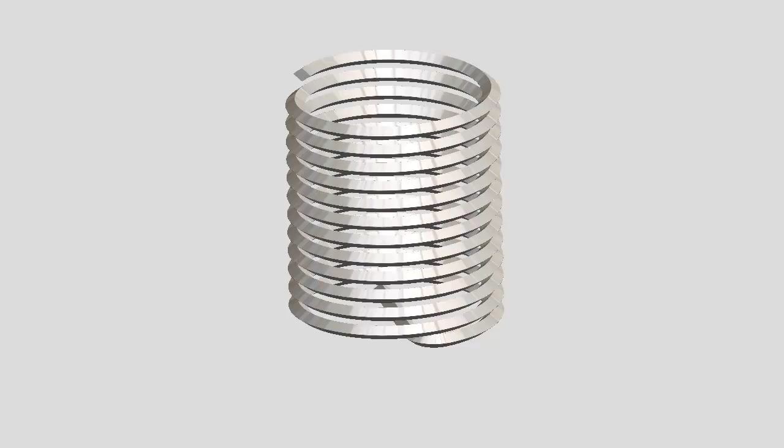In this video, I will demonstrate the use of a helicoil thread repair insert. A helicoil is essentially a spring made of formed stainless steel coil wire. The wire has a diamond-shaped cross-section that becomes the new threads once the insert is installed in a housing.

The insert is provided with a tang that is used to install the insert, as I will demonstrate later. There is a slight notch that is provided to help break off the tang after the insert is installed.

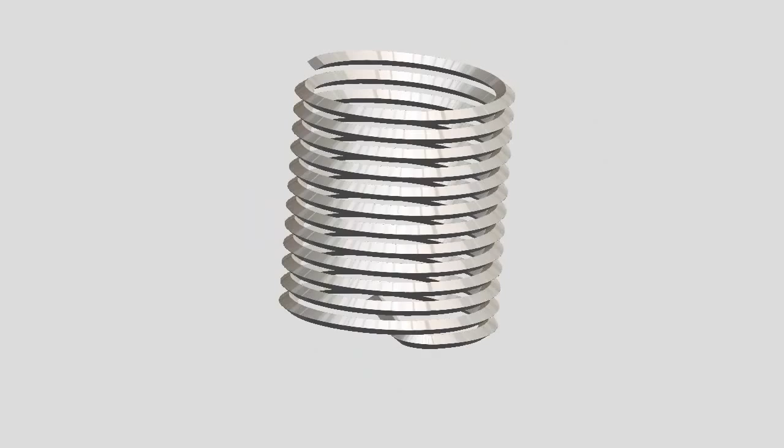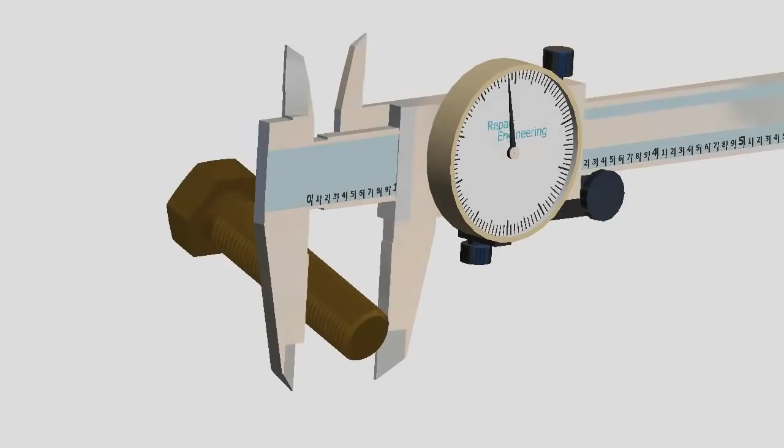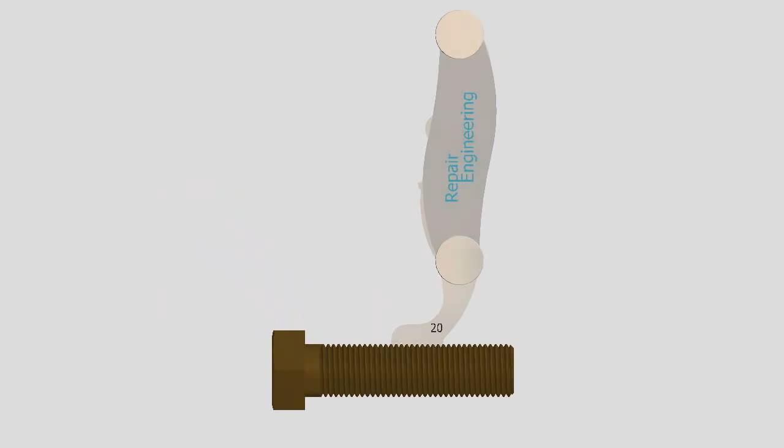Start by determining the size and pitch of the thread being repaired. One way to do that is to measure the thread major diameter of the mating bolt. Then, measure the thread spacing, or pitch, using a thread pitch gauge. You want to look for a good fit between the gauge and the threads of the bolt.

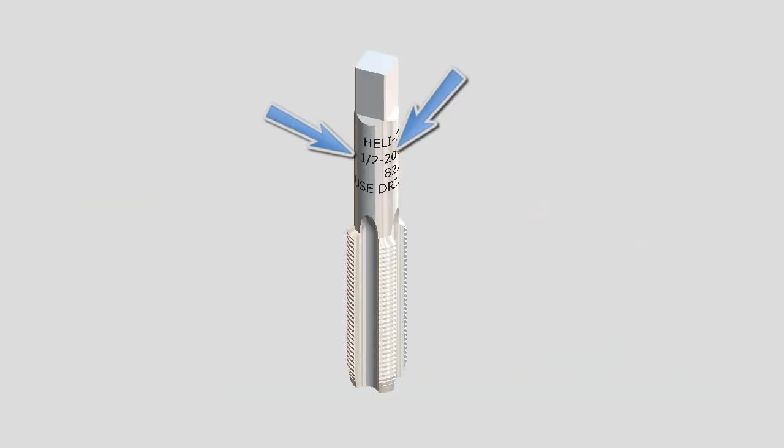Knowing the bolt size and thread pitch, select a repair kit that is appropriate. The thread size and pitch are marked on the body of the tap. This marking of STI indicates screw thread insert. It is not a standard tap size. Notice that the recommended drill size is also marked on the tap.

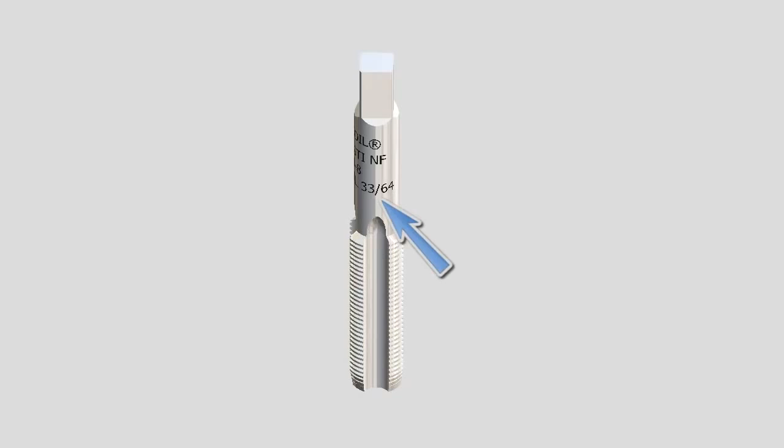To prepare the housing for installation of the helicoil insert, drill out the old threads in the hole to be repaired using the recommended drill, and cut new threads using the helicoil STI screw thread insert tap.

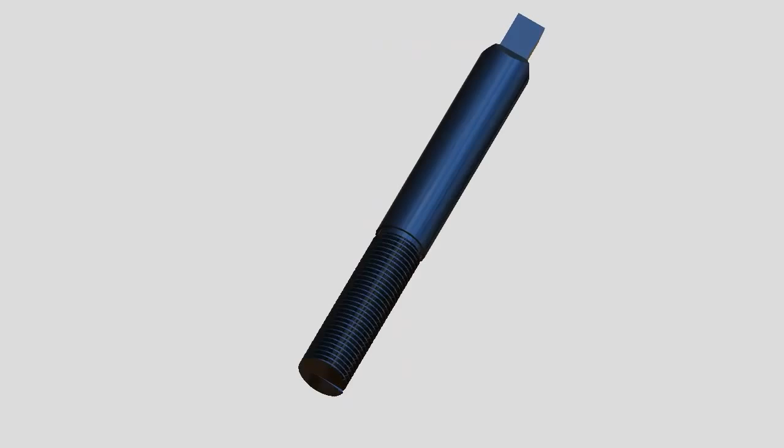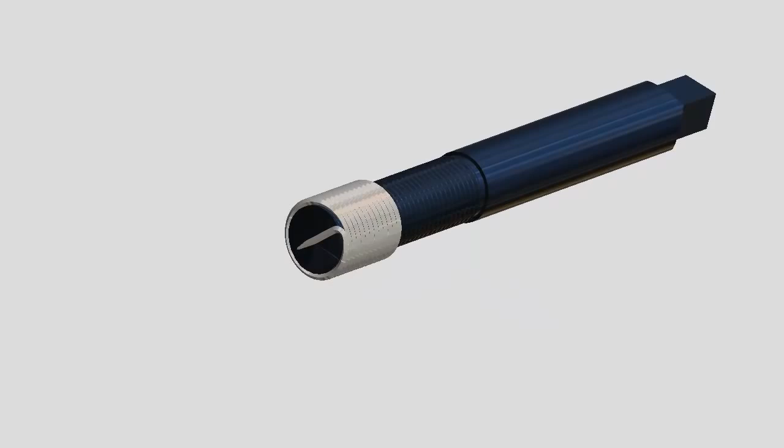A helicoil is installed using an installation tool or driver. The installation tool has a notch that engages the tang of the helicoil to help thread it into the housing. When repairing coarse pitch threads, simply slide the helicoil onto the driver and rotate the insert so that it contacts the notch.

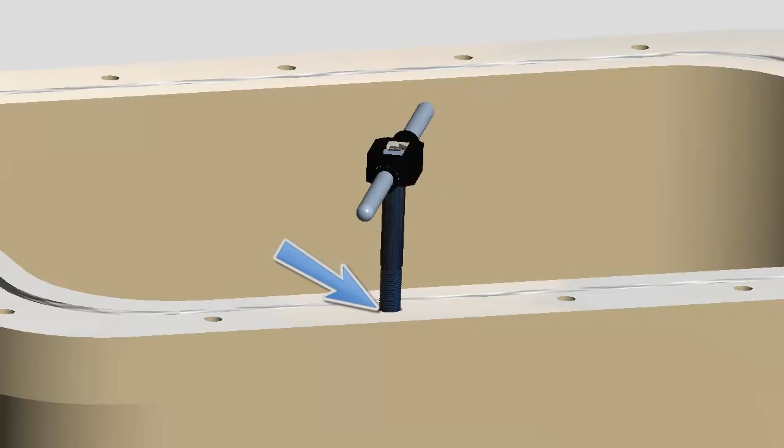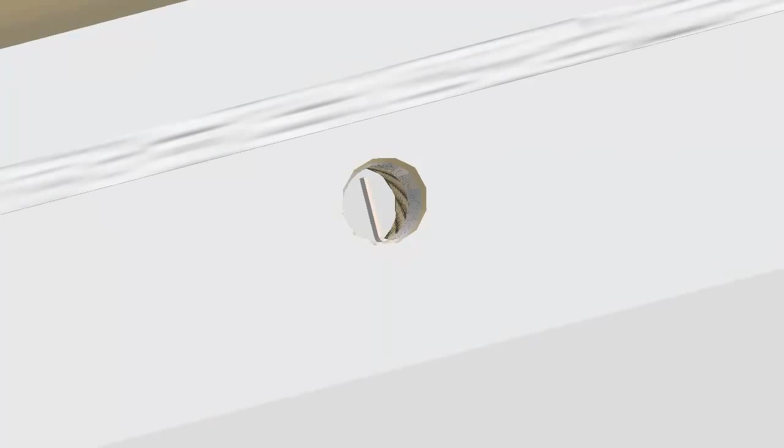Install the helicoil into the housing by threading the insert into the newly cut threads. Be sure that the end of the installed helicoil is recessed below the flange surface. Once seated to the proper depth, unthread the driver from the insert. At this point, the tang of the insert is still attached. I will demonstrate how that is removed in a moment.

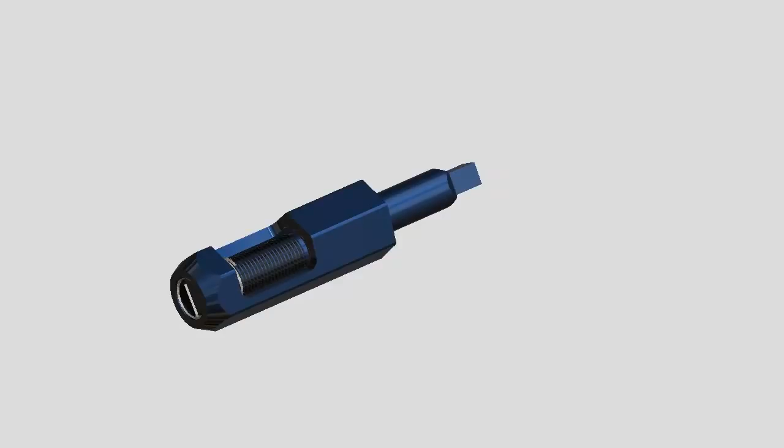When repairing fine pitch threads, a pre-coil housing is needed to help compress the insert threads. To use the pre-coiler, wind the installation tool into the insert, using the threads of the pre-coiler to help compress the helicoil. Then, thread the insert into the housing as before.

During this process, allow the pre-coiler to float freely so that the insert is able to follow the threads of the housing during installation. Once the insert is installed to the proper depth, the driver can be removed.

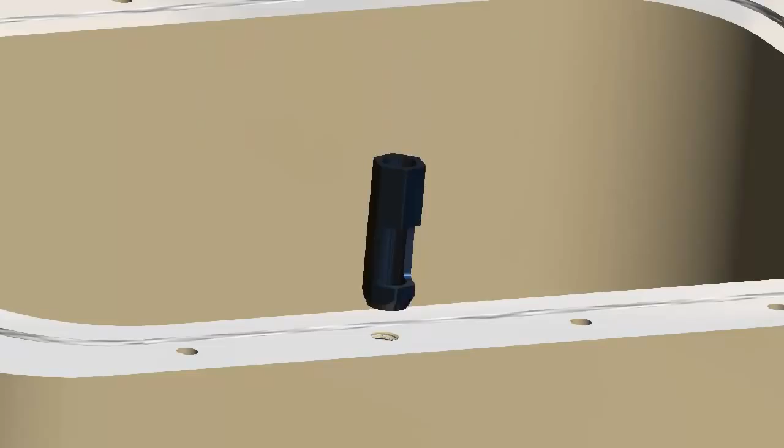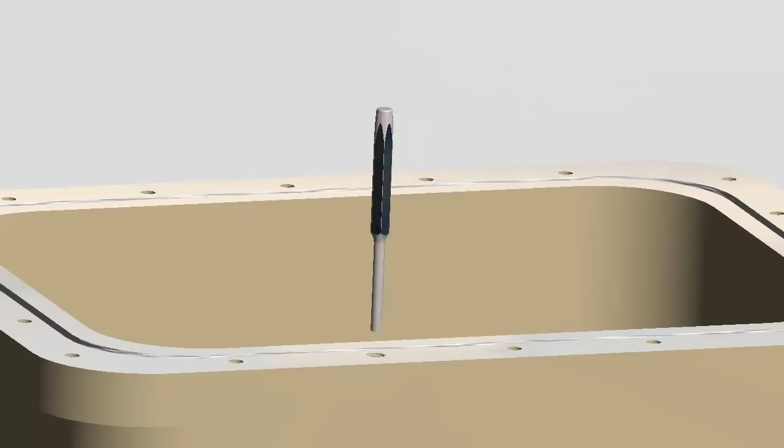To remove the tang of the insert on smaller diameter threads, use a flat bottom punch, hold it square against the tang, and break off the tang using a sharp tap with a hammer. For larger diameter inserts, a pair of needle nose pliers can also be used to twist off the insert tang.

After the tang is removed, the thread repair is complete. You should now be able to screw the original bolt into the new threads.